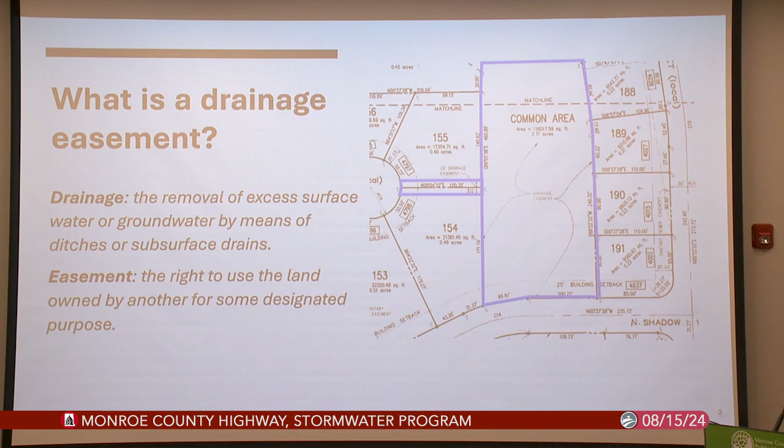During a subdivision design process, site drainage is carefully considered and incorporated into the design of each lot. Drainage easements can encompass and do encompass the entire stormwater drainage system that is outside the public right-of-way. They're designed so that they are directly accessed from that right-of-way for maintenance purposes, so we're not tearing up yards. We have a direct connection to them. Most often, you'll see them depicted within a common area, such as a large blue area, or along property lines, split between two properties.

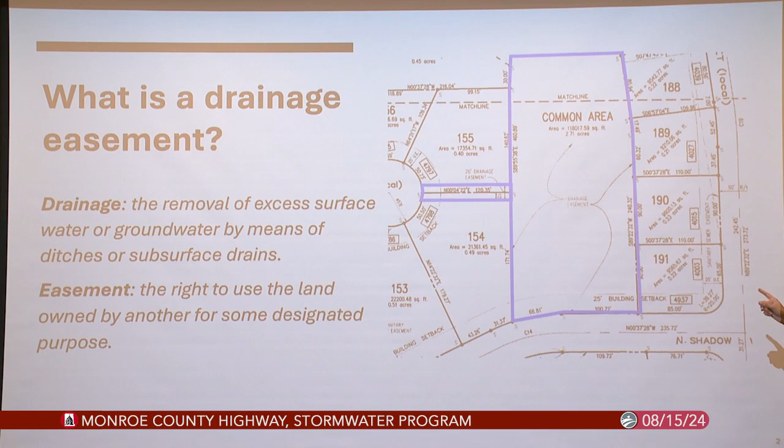So what typically gets included within a drainage easement? Stormwater conveyances can be through pipes, swales, held in detention ponds or basins, or it can be an existing flow path such as a creek or a stream. Any pipes that are outside of the right-of-way that bring stormwater from the road to a detention pond are going to be included in a drainage easement.

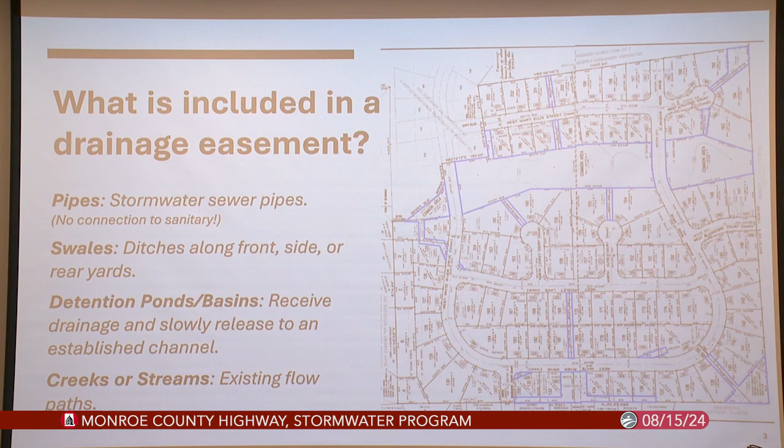Again, they're often between lots or across several lots, and they should be kept free of obstructions. Typically, the ones that are kind of in the rear of a yard where you see them are going to be swales along the rear yards. So there might be some slope to someone's yard. They're not going to be perfectly flat.

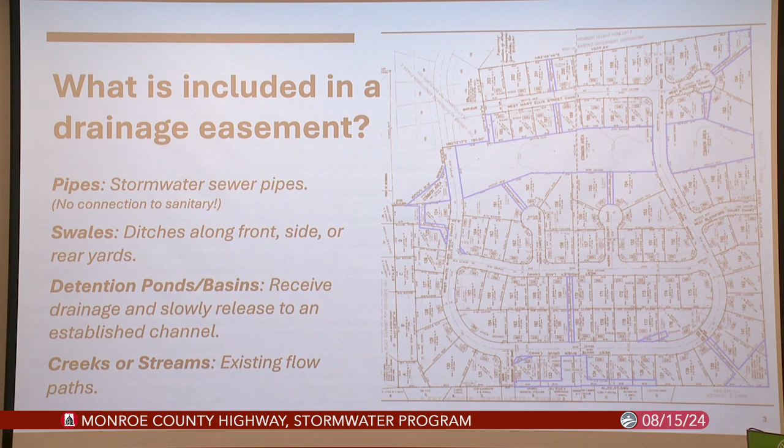So we recently updated our stormwater management ordinance, Monroe County Code, Chapter 761, and within that are some drainage easement requirements. It's a lot of words, so I highlighted the important parts. They shall be kept free of obstructions. We don't want to impede that flow of water. We want it to go where it's designed to go, otherwise you can end up with some issues backing up water on your property or your neighbor's property.

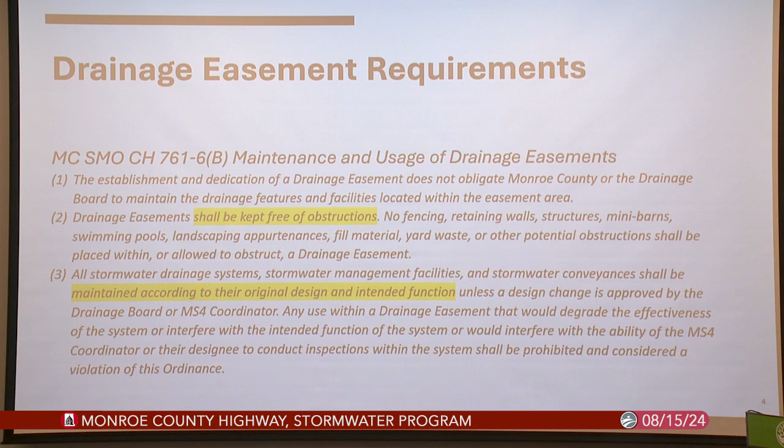Also highlighted, they should be maintained according to their original design and intended function. So intended function is to convey stormwater. We want them to maintain that design. They're designed for a certain capacity. We want them to be able to move that water away from homes where it's supposed to go.

A couple other requirements: they should be maintained by the people that own or lease the property through which they pass. And obstacles that would pollute, contaminate, or significantly retard the flow of water should not be placed within a drainage easement. So sheds, play sets, raised beds, gardening - avoid putting those in a drainage easement.

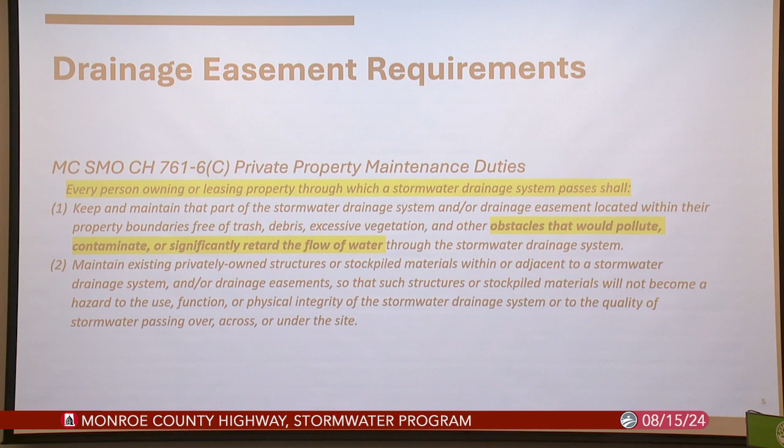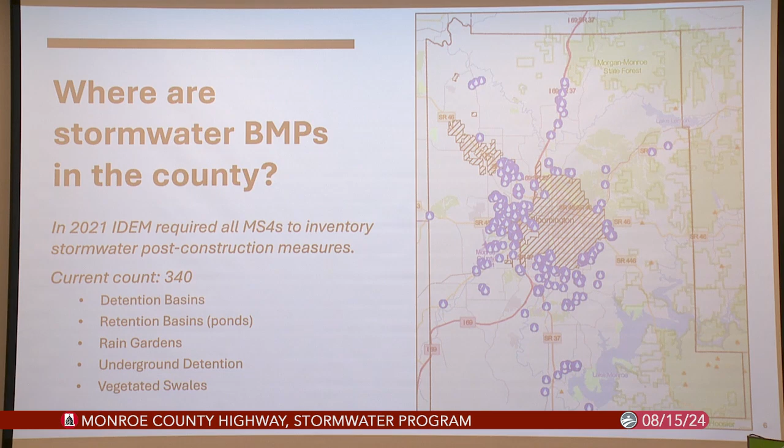So I've mentioned detention basins. Where are they? If you have an HOA, you're part of a subdivision, you probably have noticed one on your property. Our Monroe County Stormwater Program has an MS4 permit, meaning Municipal Separate Storm Sewer System. So our stormwater is separate from our sanitary system. Under this permit, we are required to implement 6 minimum control measures. Post-construction is one of them. Under that, we are required to inventory all of our stormwater post-construction measures.

So in 2021, I started an inventory of all of the basins: detention basins, retention basins, your ponds that hold water, rain gardens, underground detention. The new public library location on the southwest side has some underground detention under that surface parking. It's really cool to see it go in, and you wouldn't even know it's there now. So I've documented that, and some vegetated swales as well.

So this is where they are in the county. You can see that they are concentrated on the west side, south side, some extending up I-69. I have not done the inventory in Bloomington. That's going to be their own separate inventory. You can ask them about that later.

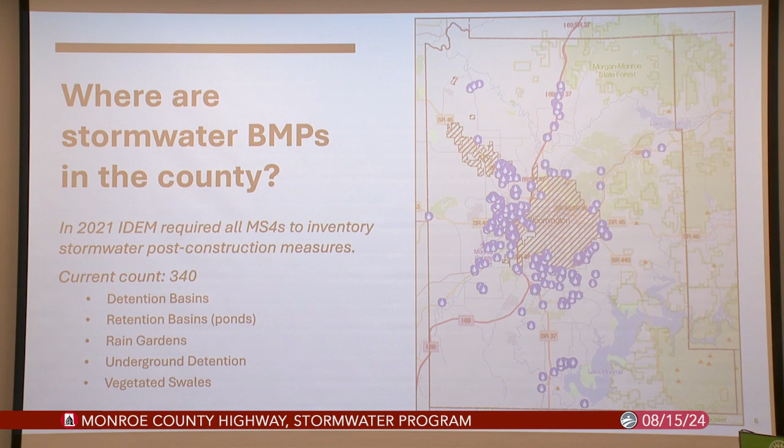Okay, what is a detention pond? What is a detention basin? We'll use those words interchangeably. Depending on the engineer or designer that put the plans together, they might use basin or pond. These are typically found in our common areas, and they are meant to restrict the flow of stormwater at a prescribed rate. We want to know that water is being discharged at a certain rate to limit impacts downstream or outside of the subdivision. So detention basins only temporarily hold water.

A retention basin, what you think of as a pond, has a base water level, with built-in capacity above that base level for rain events. But typically what you're going to see is a detention, which detains the water and releases it. That water should be held for 24 to 48 hours, maybe 72 hours if we've had a lot of rain and the ground is saturated. But typically you're not going to see it a few days after a rain event.

The design capacity is related to the subdivision size and other important features, such as if they're in a critical watershed - we want to make sure that the drainage doesn't impact the critical waterway.

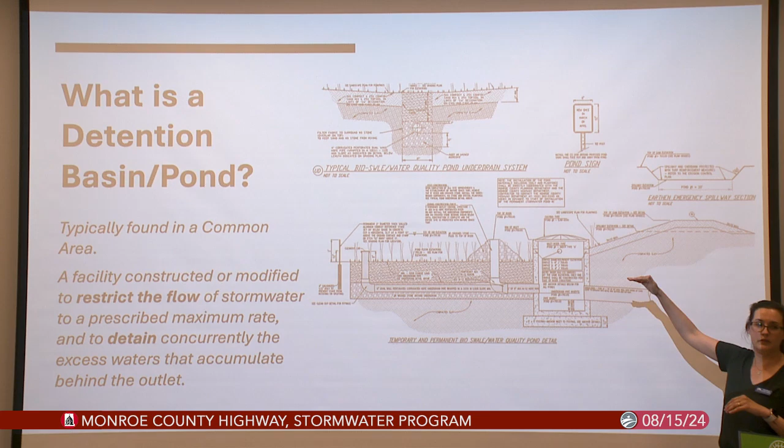So now the typical components - this is a little bit of a complicated image, but let's see if I can sneak in here. This is your control structure. You've got an embankment, and then your embankment is going to have an emergency overflow. So if the water level reaches a certain height or depth, it's going to go over at a designated point, which will let that water overflow to a designated channel.

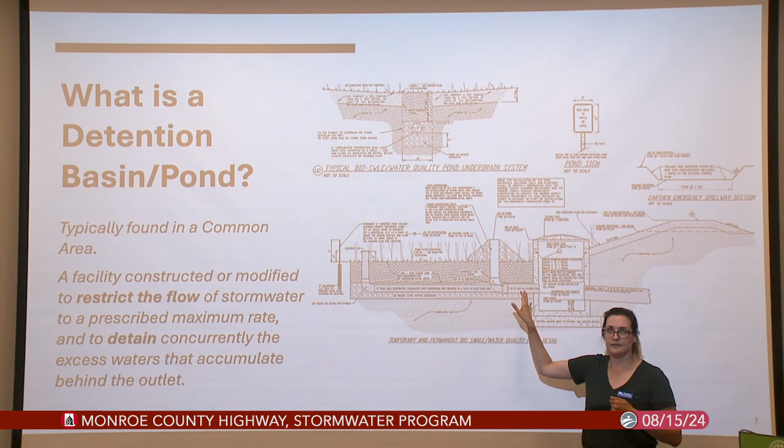You've got an underdrain system, so the water is going to percolate down, infiltrate, and then outflow, which is why you don't have that standing water. You've also got some inflow pipes that are going to be your drainage from the street, or yard inlets, which collect it and bring it into your basin.

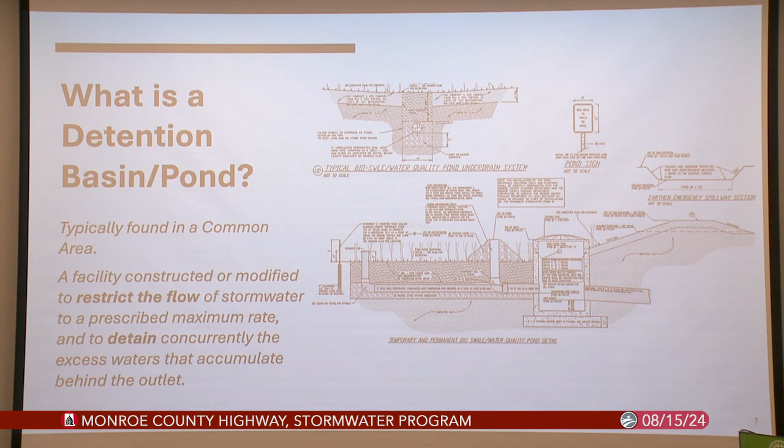So more language from our stormwater management ordinance. We go out and do long-term post-construction inspections. The state requires us to be on a rolling 5-year inspection schedule, so you'll see us out there every 5 years just to make sure that they're still functioning how they were supposed to.

Any major deficiencies that might be found during our inspections, or your own inspections as you are inspecting your infrastructure, you are required to take necessary measures to correct those deficiencies, and again, maintain them in good condition. So those were already the requirements at the state level and then at the county level to maintain those detention basins, but it's been brought again to the forefront and is more explicitly called out within our ordinance.

You do have O&M manuals. Many of them have been recorded, many of them have not. I don't know exactly when that practice started - do you have an idea?

So hopefully we can help track some of those O&M, operations and maintenance, manuals down for you all. The recorder's office may have them. The original design firm, the engineering firm that designed your subdivision, may retain some of their older records, so they might have something - can't always guarantee it. But we'll work with each HOA as needed to work on maintenance requirements and find that O&M manual so you have a sense of what it was designed to look like.

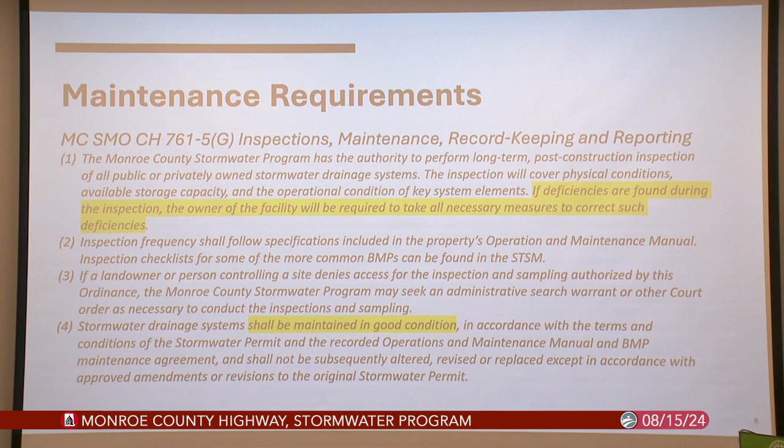Some of that typical maintenance is just mowing. You mow the embankment, keep trees from growing on it. The trees can weaken it and cause points for water to erode and leave where you don't want it to.

Mow and trim within the main pond area. You're going to have bioswale plantings in there, hopefully, so you really only need to mow in there once a year - that's great. If there are trees that were planted or may have grown in your basin, prune them so you don't have dead branches and things that are going to cause blockages at that outlet control structure, that big concrete structure. And then reseed any bare areas that may arise. So most typically, it's just mowing and trash or debris removal - leaves and branches that might accumulate.

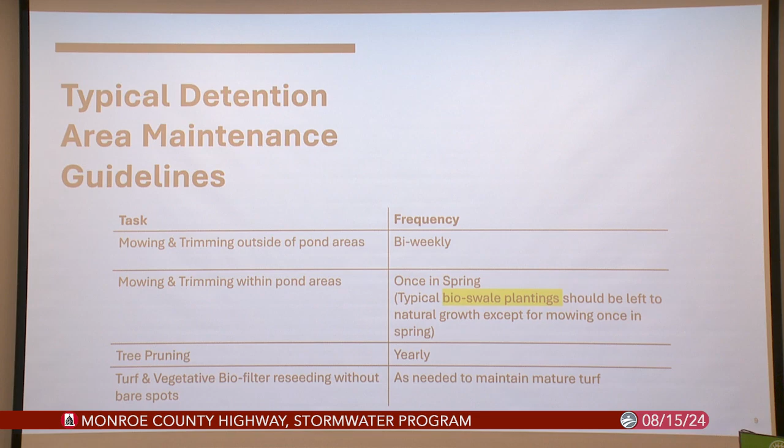So I won't get into a long list of recommended plantings, but we highly recommend going native. Those are going to be deep-rooted to help with infiltration. They'll also help with erosion, and you won't need insecticides as much because you'll have native insects and native birds that eat those insects. You also won't require as much fertilizer because they're suited to this area. And another perk, birds and butterflies will come along.

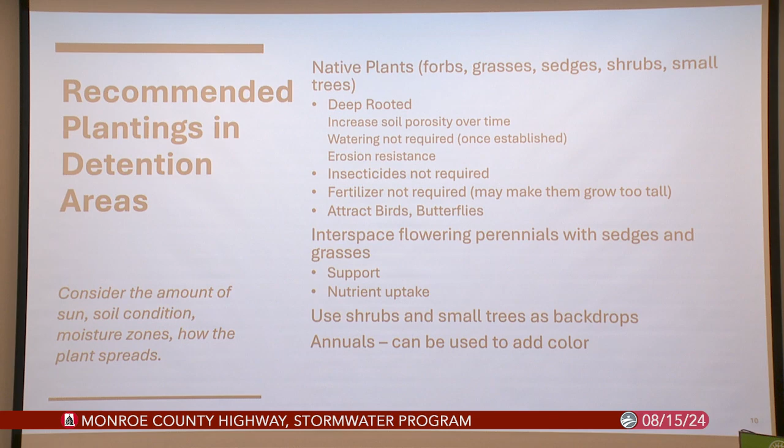Perennials are great, native shrubs, annuals, also all great. And again, those native plants just do better with our weather patterns and have a better chance of surviving. I can provide more plant recommendations at a later date, but I didn't want to overwhelm with that kind of information right now.

And that's all I have. Does anyone have questions for me on basins, drainage easements, infrastructure? Yeah.

You said the area should be mowed once a year in the spring. How short should it be cut? So just the area down inside the basin, I think you want to leave some there, but I wouldn't go golf course low.

What are you looking for on your inspection? So my inspections, I'm doing a once around of the whole thing. I'm looking at where's water coming in, is there erosion at that inflow pipe. I'm looking at the outlet control structure itself, is there a buildup of sediment or debris that might be blocking it or covering the top of it, because that can cause backups and issues with releasing water when it's supposed to.

I'm looking along the embankment to look for erosion, trees growing that might cause issues, are there animals burrowing into the embankments, looking for if there are native species or an overabundance of non-native species. How accessible is it to get to maintain?

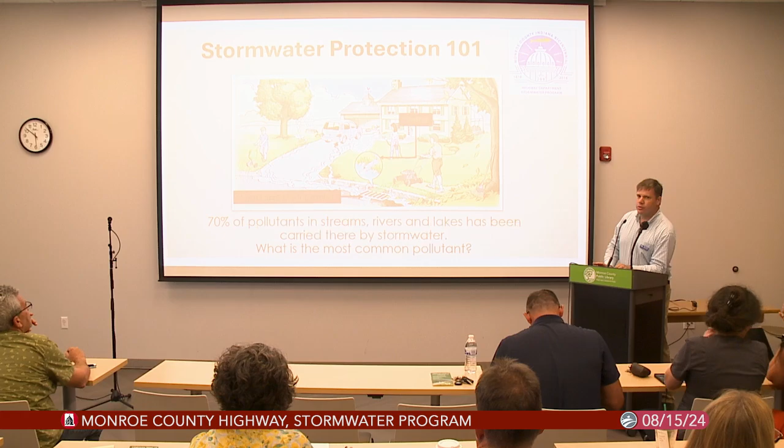Okay, this is a typical scene within an HOA or just a residential subdivision. I realized after I selected this shot - let me ask you, what's not happening in this picture? Without leaf pickup.

The way they're putting it on the curb is not controlled. There's a lot happening here with the lawn clippings going straight into the storm drain. We call them inlets for the highway department, so if you see inlet on this presentation, it's the same thing. This might be their son applying fertilizer or pesticide to the grass. We have two situations where the grass is being watered with the sprinkler and on the side of the driveway. This is like the worst case disaster, but there's still something that's not happening in the picture.

It talks about 70% of pollutants entering streams via stormwater. It's not raining in this picture, which I guess accounts for the 30% of pollutants that go into streams. But obviously this represents a situation where there's not really any care taken to make sure we don't have pollutants entering the storm drains.

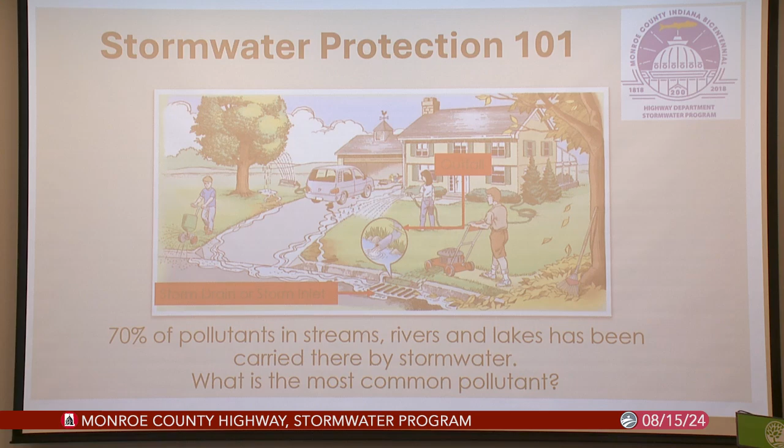In this picture you see the storm drain, and in that caption is the outfall, what we call an outfall, and I'll talk about that in a second. That's the two main components of stormwater infrastructure I want to talk about today. Erica talked about best management practices in neighborhoods. This might be an older neighborhood that doesn't have a BMP, that just has storm drains, and they might have an outfall near the subdivision. So I'm going to just restrict this to inlets and outfalls.

Does anybody know what the most common pollutant is for stormwater, by volume? The most common pollutant by volume is sediment. That could just be from bare soil, from a construction site, or maintenance being done on a property where you have bare soil that's not stabilized. Okay, so we'll move on to the next one.

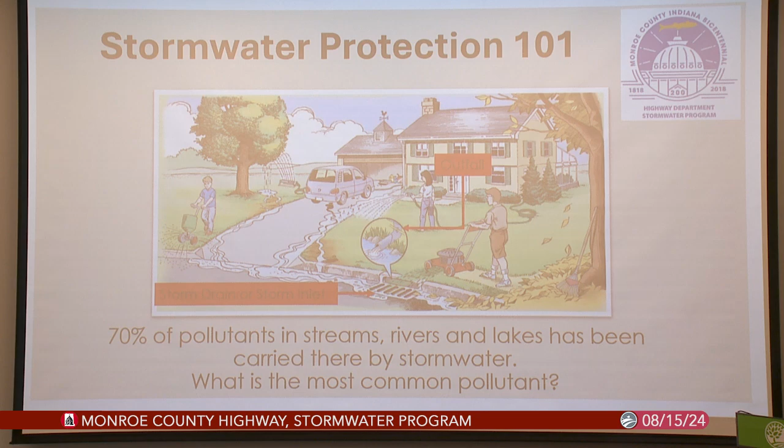This is an example of a storm drain in a residential neighborhood. Most of our storm drains, about 58%, are actually in residential subdivisions, so they account for the majority of what we have to oversee and ensure is protected.

Does that fall under you guys maintaining the stormwater outlets themselves, or is that under highway? You mean for the... well, when you said maintain, I understand the stormwater cleaning, et cetera, but actually the structure itself? Okay, yeah, so the question is, who does the maintenance of the storm drains? Is that the particular structures themselves, is that part of the highway?

Yeah, that's at the highway department. We have two street sweepers that have routes that go around and clean all the inlets. And if you ever see an inlet that's clogged or in need of repair, we encourage you to contact us so we can address that. We want to know about that. That's what I meant by maintenance. And if the drain is actually physically damaged, we'll put in a case to investigate and then ultimately repair that.

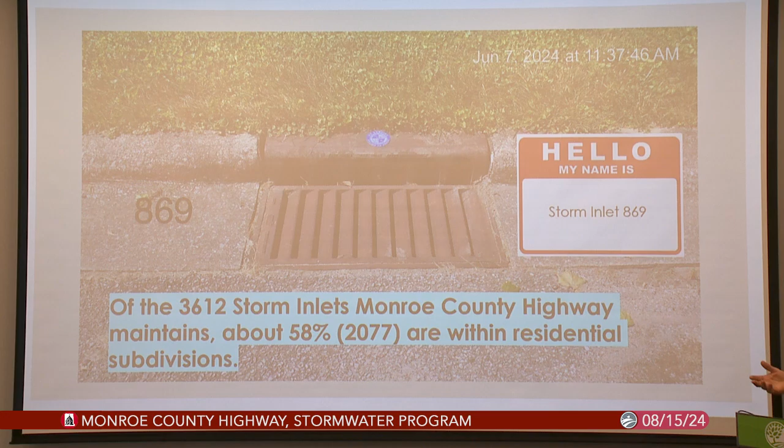It's important to note that's within the right-of-way, along the roadway. That's why I want to clarify in regards to stormwater, homeowners associations and whose responsibility that was, that it's not in the easement.

You had a question? I just want to clarify. So if you've got a subdivision with an HOA, they are not responsible for the maintenance of the stormwater structure and cleaning it out and all that? If it gets clogged up, that's something the highway department takes care of?

Yeah, for the most part. If there's any mystery about that, because there are some storm drains that are marked as being private, if you have any questions about that we encourage you to contact us so we can clarify whether it's the highway department or the HOA that's responsible. But I think the vast majority are going to be maintained by the highway department.

We ask homeowners to do just general maintenance, like clearing leaves off if it's clogged. Just keep an eye on the infrastructure, because we don't inspect all the inlets all the time. We rely on people calling in to let us know something's not working. So if you can clear them, that's great within your means, but for bigger fixes, call us. We wouldn't stop you from clearing away some grass clippings, and we appreciate all the assistance. Even if it's just a phone call, that's fine too.

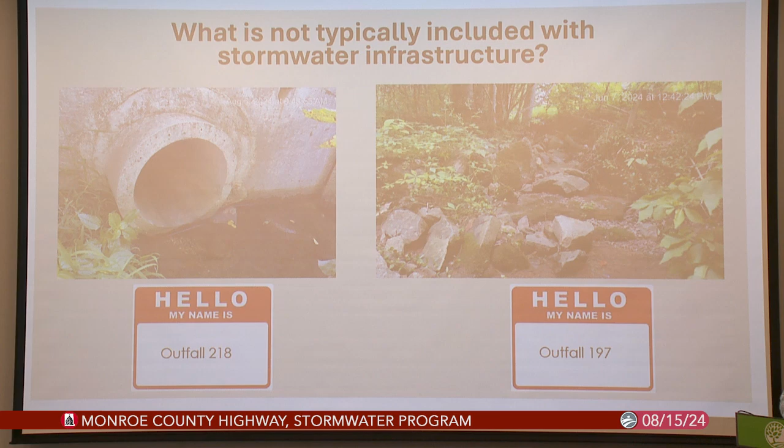Okay, so this is what impacts - anything that goes into the storm drain is largely not treated. There's no collection of trash or sediment.

So a lot of the watersheds in Monroe County actually drain to Lake Monroe. Does everybody understand what a watershed is? It's basically, if you think of a bowl, a cereal bowl, it's the lowest spot on the land, and water travels down gradient - you can map it using contours to determine where the water flows.

We depend on stormwater - it will ultimately become drinking water once it's been treated. Lake Monroe is a valuable resource for recreation, for fishing, and for drinking water, obviously. So we want to protect that.

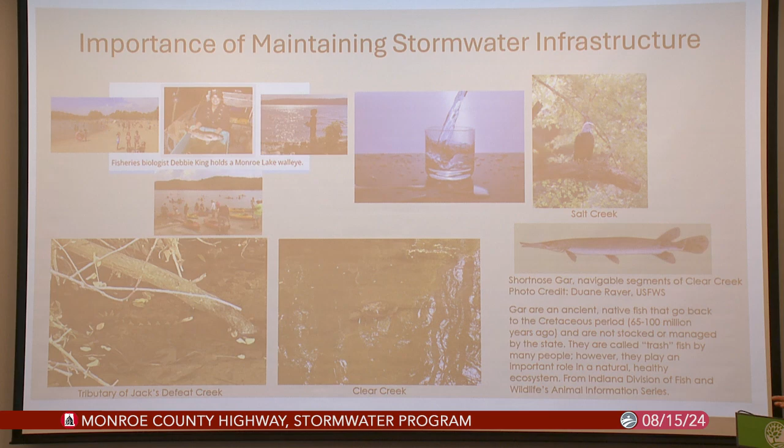I just put this - I went kayaking a few months ago, and in Clear Creek we actually saw a gar. It was really cool to see, and they actually travel along the kayak with you. We looked it up, and these things have been around for 65 million years. So that's something we have here in Monroe County.

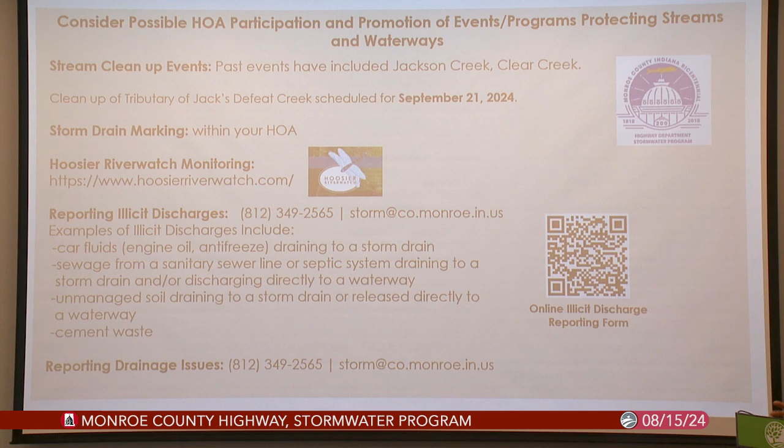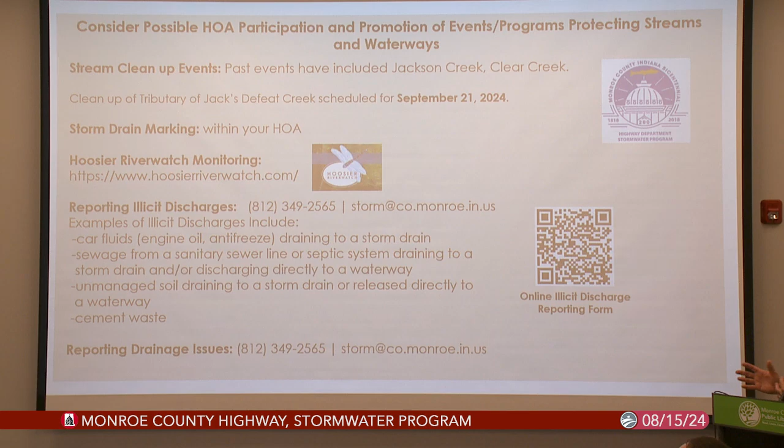All right, so we want to encourage a relationship with HOAs. We want to have opportunities for HOAs to participate in storm drain marking or cleanup events. If you have an HOA that's adjacent to a stream and you'd like to organize a stream cleanup, we'll be more than happy to help you do that and make sure we remove as much trash as can be removed. So there's other events we'd like to encourage, like Hoosier Riverwatch.

Reporting illicit discharges - that's what I just spoke about with the introduction. It might be that somebody had work done on their concrete patio, and the concrete or cement waste was introduced into the storm drain. We want to know about that so we can stop the release and do enforcement so it doesn't happen again. And then just reporting drainage issues - we want to encourage residents to do that and to know who to call for that.

So that is, in a nutshell, what a reserve study is. The first thing we do is come out and take an inventory of the items. There are different types of communities - if you're a single family community, a lot of times you might have a pool, some ponds, that sort of thing, so that's what we include.

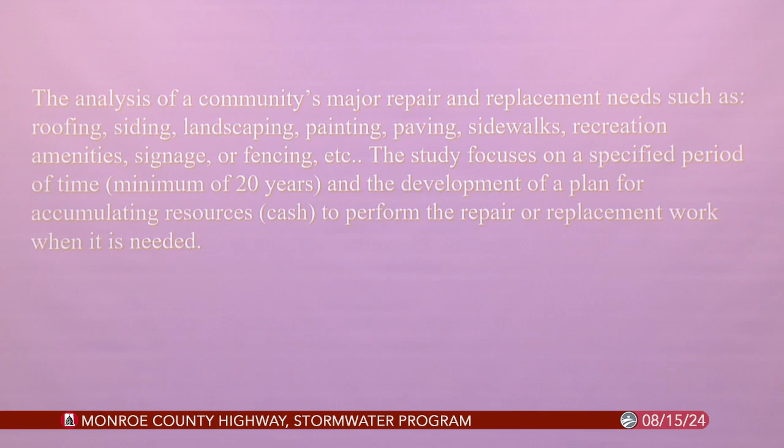If you're a condominium association, what we're going to be talking about is your roofing, your siding. And again, this is why I think it's really important to have an attorney give you this checklist. I don't know if anybody has a checklist for your owners - as soon as your owner moves in, give them this checklist: this is what we are responsible for, this is where your fee goes.

Once we get this all put together, we ask you how much money you have in your reserve account, and how much you're contributing to it from your budget. If you're not contributing enough, this is where I become the mean guy - you need more money, and here's the recommendation. We do a 30-year study, which is a long way out, but this, as Leah mentioned, is about the fiduciary responsibility of the board.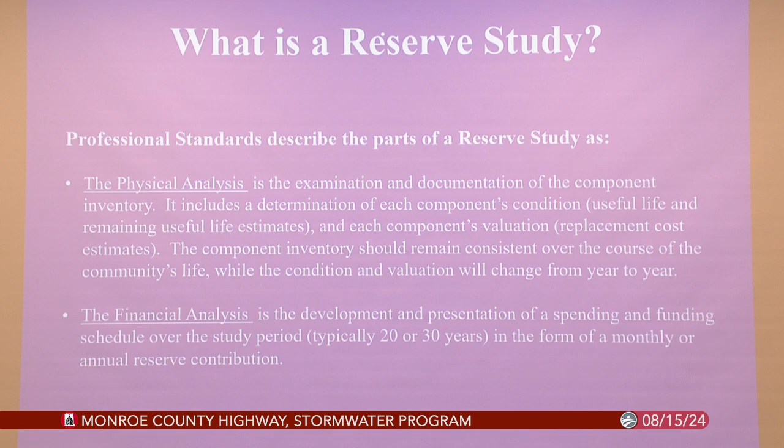Maintaining the property - that's what it's all about. The other misnomer about a reserve fund is that this is not a savings account, it's not a rainy day fund. It's designed to repair depreciation on your assets. So again, it's physical, it's financial - the main thing it does is protect your investment. That's what this is all about.

The ideal way, usually - and Leah can attest to this because we've done a lot of studies together - a lot of times communities don't come to me until they're 30, 40 years old, and next year they have to replace a million dollars worth of roofing, and they've got $25,000 in their reserve account. They come to me and I'm like, you don't have enough money. But this is what it is, it's how we all live. It's like, you know, I just said it's not a savings account, but it's kind of the same thing. The more you've got in your reserve fund, the more you write the narrative of what happens.

Exactly. The more you can get from your homeowners - and I don't mean it to sound that way, this is not a profit situation. When I do these reserve studies, one of my jokes is I tell people at the end of this, I want you to take me out to dinner, but not a good one. What I mean is we're trying to get enough money to take care of these responsibilities, but not overdo it for your owners. The best way to do this, in my opinion, is to do it at an even level, so people are using up the same amount of assets as they're moving in and out of the community.

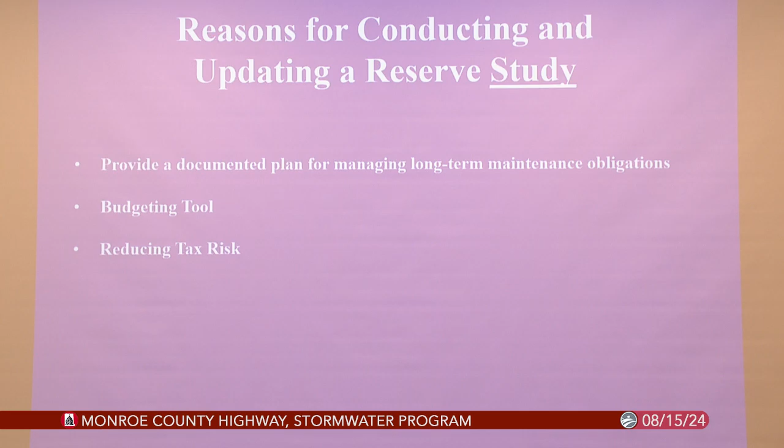Am I correct in believing you have a system, say for a drainage system getting ready to go into a subdivision, and I bring this to you - you have some sort of system that says they need to be putting back X amount of dollars for X amount of years? Because if I put this thing in, and now they're responsible for it, it gets to the HOA after about 5 years. So now they have it. How in the world would we come up with a number that says we can handle something? Because when it happens, she could come out and look at it, and maybe it was defective pipe, maybe something happened with the geology around it and the system isn't draining correctly, and all of a sudden this could be a $20,000 bill, $50,000 bill, $70,000 bill. So how do you prepare for such an unknown?

It is a great question, and the answer is: do your best. Here's what happens - there's certain things we can quantify. Roofing is a good example, we've got a pretty good idea. A dimensional shingle is going to last you 25 years, 20 years, somewhere in there, and we know roughly how much that's going to cost you.